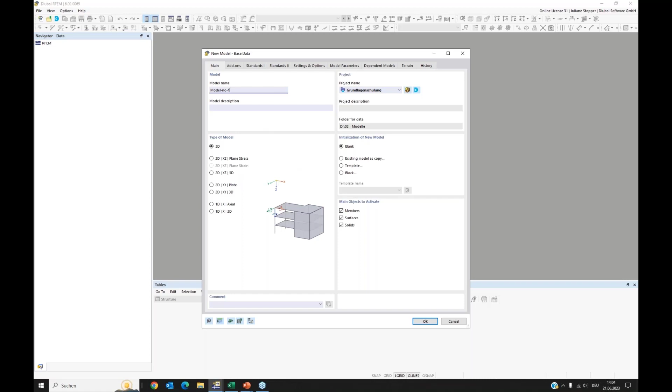In this register, I don't need to change anything. We can jump to the add-ons register and activate our geotechnical analysis add-on. We can find this in the area where the special solution add-ons are placed. So I activate it and press OK. Then our model is prepared, and the add-on will be integrated into RFEM.

So here we go, we have an empty model now, and we can start modeling. At first we go to the materials, and I will create the materials that we need in this first model. I will use materials from the library. We can open the library via this button, and I will use a gravel, a sandy gravel, as the first material.

I can apply this, then I will add a next material. We can have a sand, maybe coarse sand, and we add a third material, a medium plastic clay. This is just an example of materials because we will focus on modeling today.

So yeah, I agree—one more thing. When we have the geotechnical analysis add-on activated, we can select the material type soil. And when we have a material of type soil, we can find in the material model part the valid soil material models. We currently have the Mohr-Coulomb model, and we have a nonlinear elastic material model.

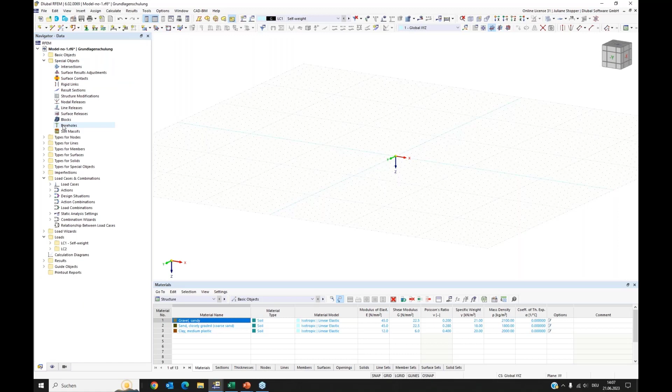Okay, so we have 3 materials prepared. We can see them here, and we can go on. We will go directly to the special objects, and here we can see 2 special objects that came with the add-on geotechnical analysis. We have here the boreholes, and we will now use them.

Here we see the dialog for entering boreholes. The boreholes provide you an option to directly enter the data you have from your geotechnical report. For different locations at your field where you will construct your building, you have values along the depth that came from that report, from tests and so on.

And this you can enter here. You can enter the location of that borehole. You can enter a groundwater level. We will do this here. We give 4 meters, and here you can assign the soil layers.

We start from the top and go into the depth. In my example, we have the sand at the top, and it's 2.5 meters deep maybe. As the second material, we discovered clay, or found clay. It shall be 2 meters, and then we have the gravel, which is 15 meters in my example.

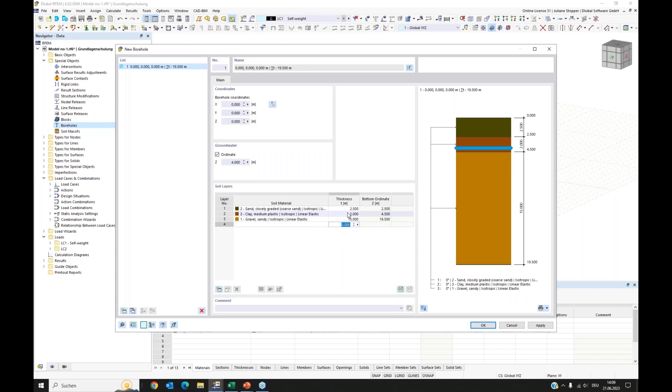Okay, now we have the borehole data given, and we can say okay. Then we see here our first borehole. I will remove this work plane, I will deactivate it so I don't see it anymore.

Here we have the first borehole, and we need some more. We have, of course, more in our field, and I therefore now will use the background layer. We can find it here in the navigator, in the guide objects. Here at the bottom you can find the background layers, and I will open the dialog.

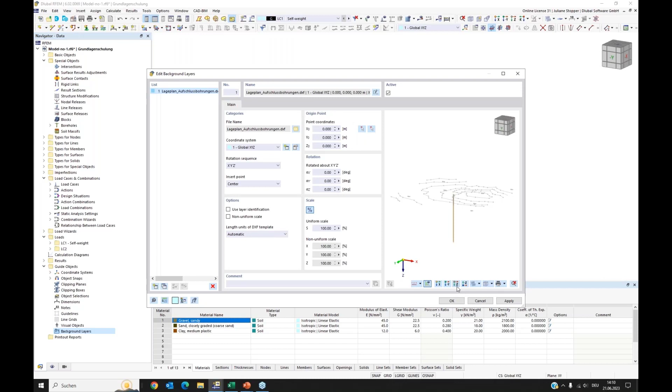As a background layer, we will import a DXF file, and I can do this here. I can directly go here. And here I have the plan of my area, and in that plan the locations of the boreholes are given. I see that I have to transform this. You can do this in this dialog, and this is the plan how it is correct.

And I want to use an option, the option use layer identification. I activate it, and there you can select the layers of your DXF file that shall be used for the background layers. I deactivate the DL nodes. And this is a preview, and I accept this, and this is fine.

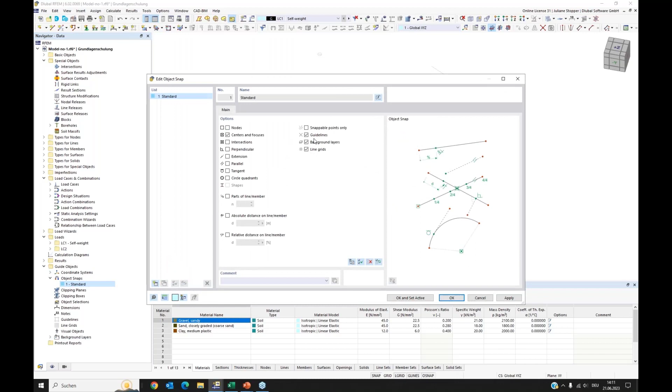Okay, now this is, let's say, my map with the positions for my boreholes. I will modify the object snaps. You can also find this in guide objects. I only now want centers to be picked, and I say OK and set to active.

So now I want to place more boreholes via drag and drop at all these locations. Therefore, I create a node at the top just to help me doing this. Okay, now I can select this. Now I select like this. I have my borehole and this helping node selected.

I press Control and I can move it to the place in my background layer in the graphic. And as you see, the last copy is always selected, so you directly can go on with copying with drag and drop.

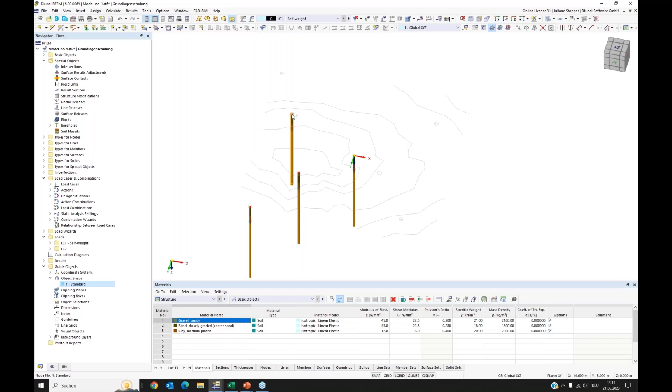And now I have my boreholes prepared. There was no need to measure these dimensions or to fill in data manually. You could just use the drawing.

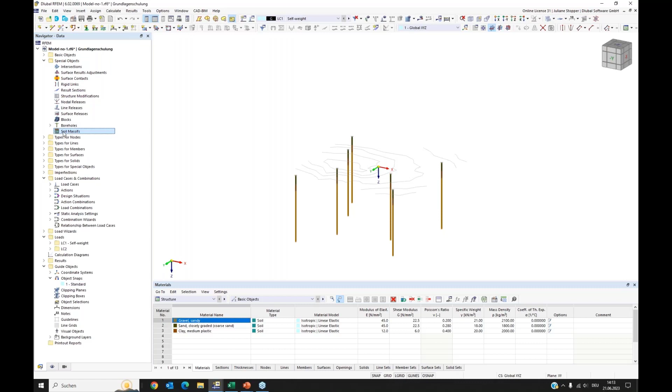Okay, then I want to use my boreholes. I can use them for creating the soil solid that shall be analyzed. And therefore we have our second special object. You can see here we have the soil massifs, and I open the dialog for this.

With the soil massif, you can generate from boreholes the soil solids that you need for the analysis. You can enter manually the numbers of the boreholes, or select them graphically. There I have them assigned.

Then you need to give geometrical information for the soil massif. You have to enter a center, I keep it with 0, and you have to give the dimensions. I will give it 40 meters along both sides. And we have the option to activate a groundwater level.

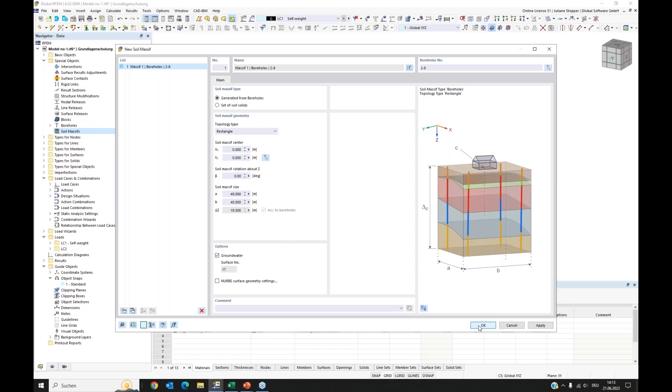Okay, we gave all the input that is needed. And now here we can see our soil massif, our soil solids were generated. I switch on the solid model so we can see it more easily.

And we have here in the navigator for display the option to change the display so that the color is dependent of the object property. We can also see here the material and the color that belongs to each material.

So what came with our soil massif? Our soil massif generated 3 soil solids for us. We can find them here. For each soil layer, 1 solid was generated. And we also have a groundwater level surface generated.

And we also have surface supports generated, this and this. We can see them also in this window when we go to wireframe model, for example. Here we can see it.

We have at the vertical boundary surfaces sliding support, so only in the local Z direction these surfaces are supported, and we have fixed support at the bottom surface.

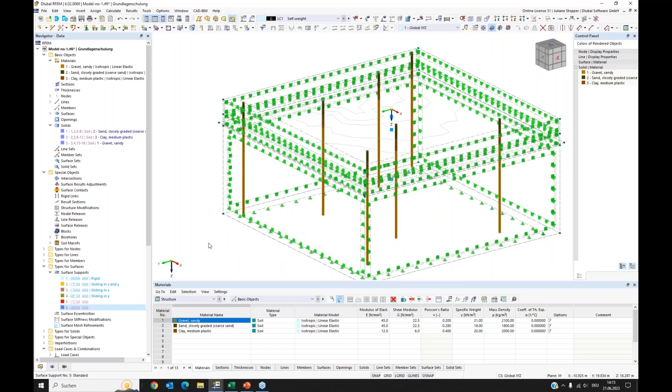So with this generation, the solid is connected to these boreholes. So if you change data in the borehole, if you change a layer thickness or something, the massif will be automatically updated. Yeah, so that's it. This is what I wanted to show with the first model.

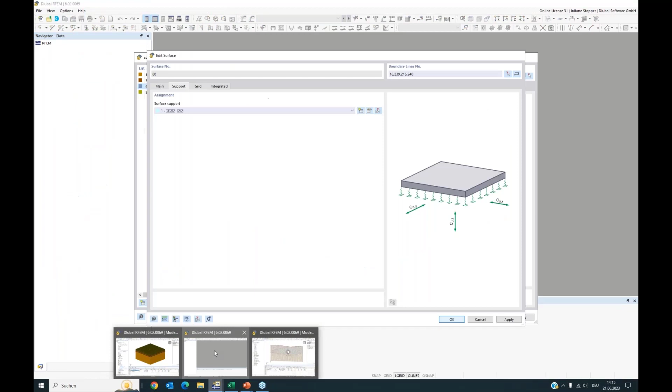We can go to the next example. This one is prepared, I will save it and we go to another RFEM for going on with the next topic. In this next topic, we want to use a DXF file again, but we will not use it as background layer. We will directly import it, and this I can do here.

I go on File and go to the Import button, and here I can import a DXF file. I have to select the file. I have it here. This is a geological section of the ground, let's say, a drawing. And we will come to an import dialog where we can do last settings before the import.

Here it is. Here again I can use this layer identification, and again I don't need all these nodes. In this case, my model is prepared, so I don't need coordinate transformation. So I can say okay, it can be imported.

So, and this is it. I have here now the DXF file imported, and now we can see the difference regarding the background layer. Here we have real objects imported. We have lines and we have nodes, and we can work with them, edit them, modify them, use them.

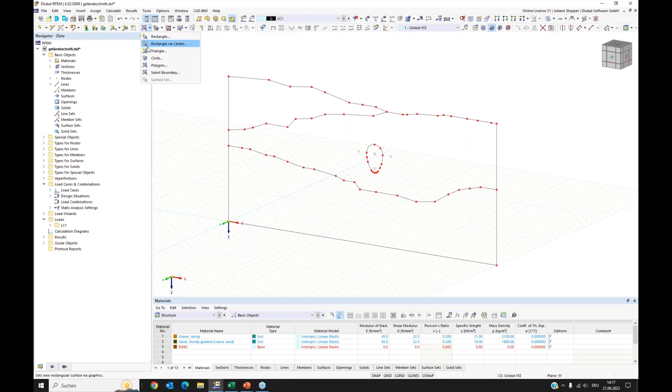Yeah, and this is what we will do, we will use them. My plan is to extrude this model into the depth, and therefore I need a surface here. And this we are going to do. We have here this button, here we can create surfaces, and I use the select boundary option.

I need a stiffness type without thickness, I don't need a thickness. It's just a surface for being the boundary surface of a solid. Okay, I have the first one. I select the next lines of the second surfaces, and the third surface is defined.

Okay, then I want an opening here. This is, let's say, the shape of a tunnel, a small tunnel. And we have here the option to create openings. Again, I use this graphically option where I can select the boundary lines graphically, and my opening is being created. With escape, I can leave this tool, and my surfaces are ready.

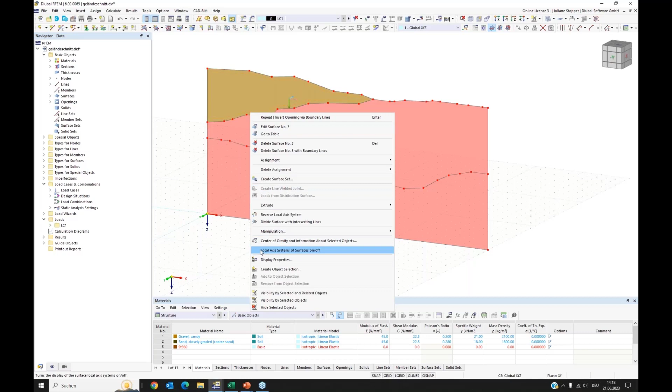Only I want to check the local axis. I can do a right click and switch local axis system on on the display. Now I see my surfaces' local axis, and I see this one is showing into the other direction. I want to have them the same orientation, so for this surface I reverse the local axis system.

This helps me now for my extrusion. I now select all these surfaces, do right click on them and go on surfaces. And here I have the option to extrude, and I extrude surface into solid. Okay, I have here this preview, but I can go here and enter the value I need.

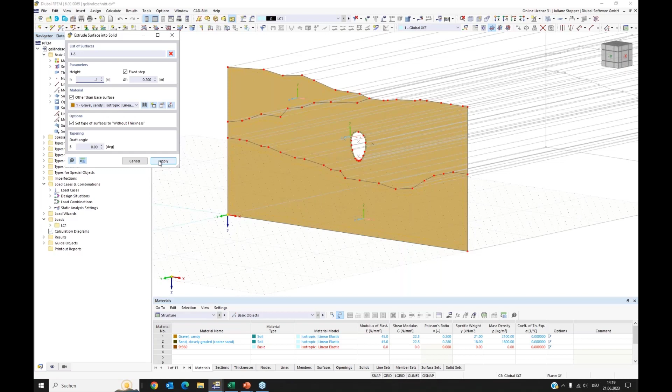I want to have -1 meter for the extrusion. I can apply this, and my model is created. I will switch off the local axis systems. This is a model that can be used if you have plane strain conditions.

Then it's enough if you just cut such a thin layer of your model, and then you can model it.

It is usable for plane strain conditions. Okay, so now here we have solids.

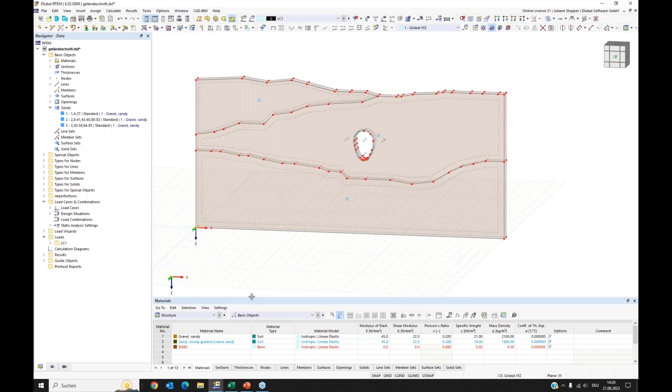What we need is the material. I have materials prepared for this model, so I want to use the Excel import. I have my material here and I import it. Okay, and now I have materials.

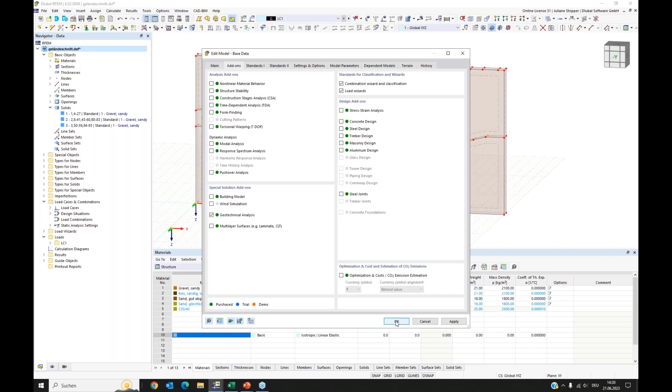I will also go to the base data. As we started with the import, we didn't activate our add-on yet. I will do this. We go to the add-ons register, and again here in special solutions add-ons, we have it now activated. Okay, now I modify my solids.

They are all standard and they don't have the right material, so I double click on the center of gravity and I can change the solid type. I choose soil, and my first layer can have the gravel. Okay, this one is ready.

I go to the next one. Here I have a sand. I will use this one, and of course it needs to be soil as well. This is needed for having the right material models, the option to use them.

Okay, I go to this one and I also set it on soil, and I will go to this material. Okay.

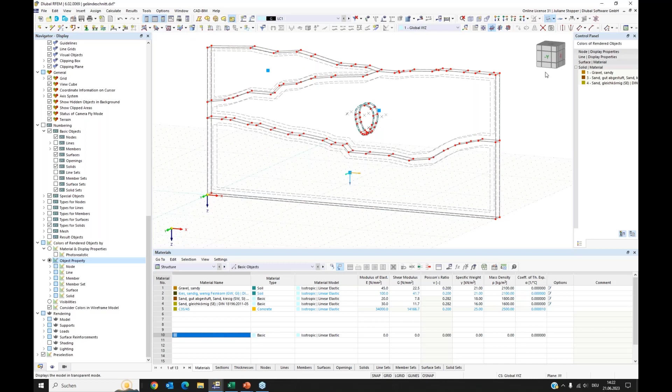Yeah, then I go here. I will change the display so that it is dependent on the object property. If we look here now, I can see that I have my 3 materials used.

Now the geometry is fine, it's finished. What I want to go on with is the boundary conditions. I go to the transparent view and I select my boundary surfaces.

With Control pressed on, I can select all of them. Okay, and now we can do a right click here and edit my surfaces, go to the options and activate the support for these surfaces.

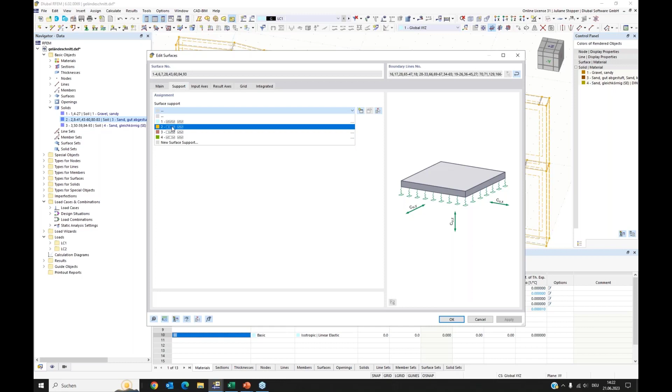I have here some surface supports that I can use. I will use this one, but we can have a look inside also. Here we can see that the Z direction of the local axis is supported, and we can see it in the display now also. Okay, now with escape I leave these selected surfaces and I select this one, the bottom surface.

This gets a support as well, but the fixed support. Okay, now my model is supported. I switch on and off the display of these supports in the display navigator. It's more easy to have the overview.

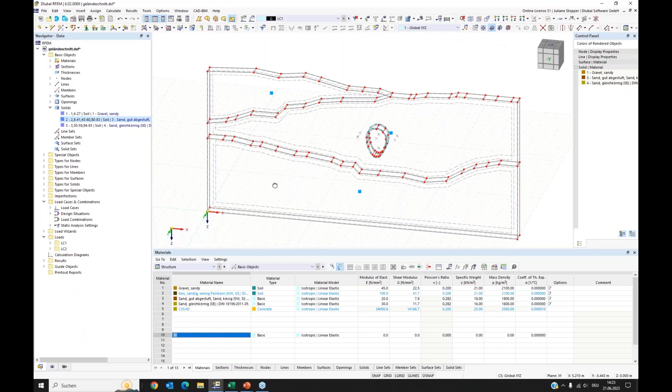Okay, now I want to go to the next step. I want to create the mesh. I'm doing this here. Yeah, and I have a mesh which is relatively coarse for this example.

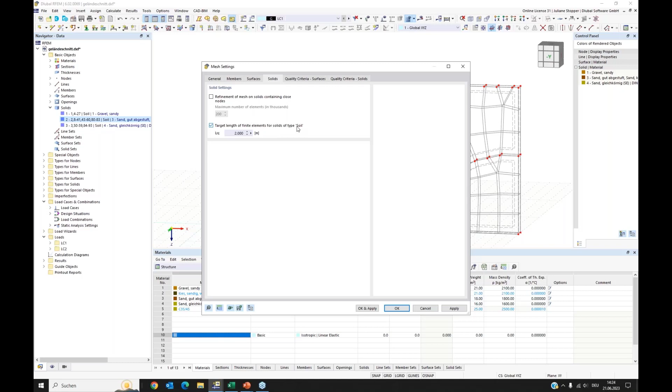We can find the mesh settings here in calculate and mesh settings. We have here a general setting for the target length of the finite elements. This is valid for all structure parts. And we have an additional setting that you can find here in solids. This is valid only for solids of type soil, so we have an own setting for the target length.

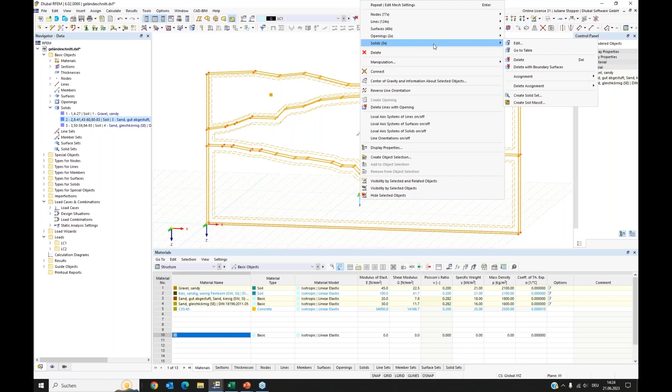Now here for this example, I want to have a finer mesh. I say okay, I don't apply it yet because I want to use another feature for the mesh. I will show you now. I select the solids and go to the center and say solids, edit, because I go to the options.

I want to use a mesh setting, the layered mesh, and I activate it for all the 3 solids. The layered mesh creates the mesh on the surface, and on the other side of the solid, the surface will get the same mesh, and in between there are layers created, and you can define here how many element layers shall be used.

For this model with plane strain conditions, one element layer is enough. So I set this on 1 and say OK.

Currently, it is needed to go here to the layered mesh. This will be worked over, so you don't need to later go there. Okay, now we have the layered mesh activated, and I will create my mesh.

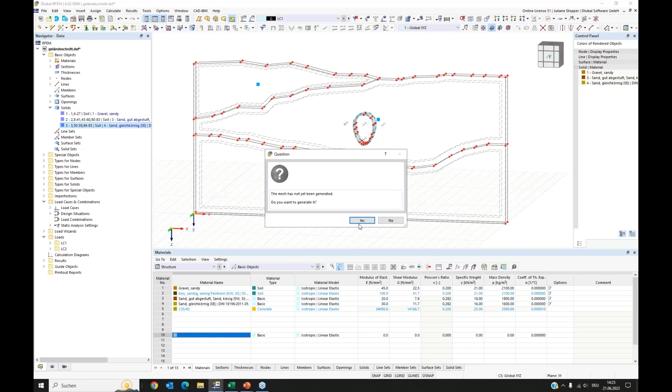Okay, and I can see a nice mesh. We will go to the navigator for display. Currently, we see the mesh of the surfaces, of the boundary surfaces.

If we want to see the solid mesh, we have to check this button, and here we can see the mesh in the solid. It's quite regular, and we can see we have only one layer element.

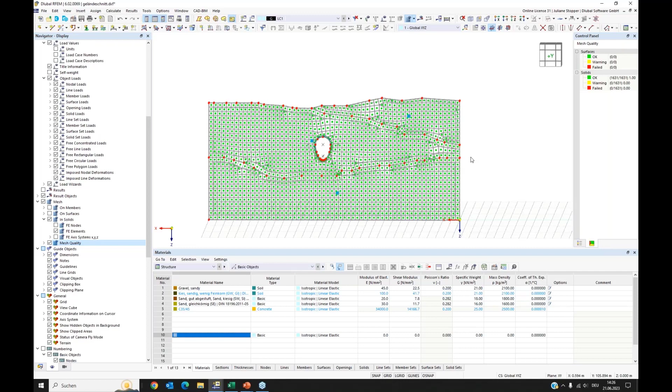One element along the depth. Okay, one last thing I want to show: you can also activate the mesh quality, and here you have an additional register where you can see the color, giving information about the quality of your elements. You can also see if there's a warning or even a failed element. The criteria for these categories you can find in Results, under Calculate and Mesh Settings, where there's a register for the criteria. Okay, that's what I wanted to show with the second model.

This is finished. Now we can come to the third model and the last part of the modeling section of the webinar. For the third model, I want to continue with our first model, for showing the IFC import.

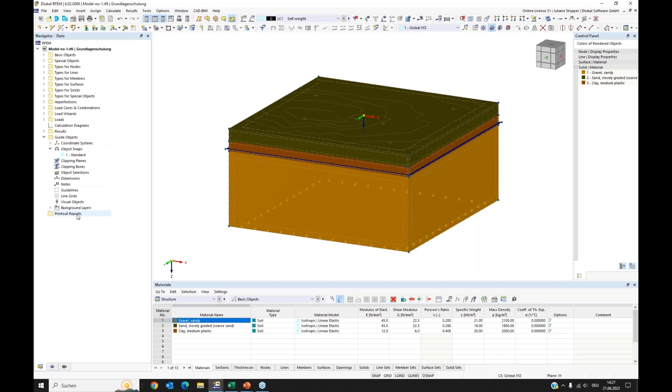Here we have our soil solid prepared. What I don't want to see now anymore is this background layer. I can go to Guide Objects, find the background layer, and deactivate it. So it's still there if you need it for graphics, you can switch it on again, but now it's not shown. Here I want to import a small IFC file of a model.

We go to Import, and here we have IFC, and I'm choosing this IFC file. We will use this - it's a very small thing, but enough for explaining the procedure.

This model needs a coordinate system transformation. Therefore I mirror Y and Z direction, and I say OK.

Here we have some information about the import. I can see which parts of the IFC model were imported, so you have an option to control whether this is what you expected.

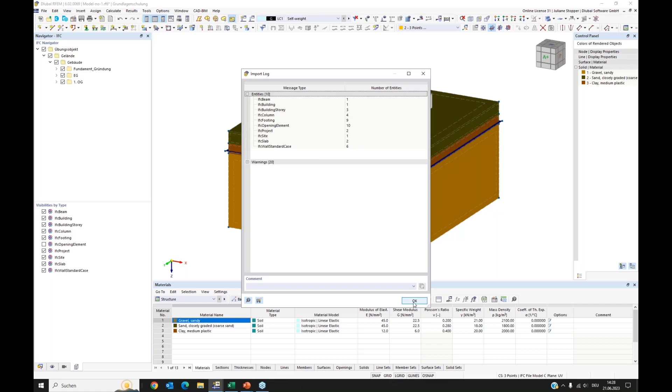Okay, now here we have a kind of IFC viewer, our own IFC viewer. You have here in the navigator an overview of the parts of your IFC model. The IFC structure is a graphical object - it doesn't consist of objects that you can use for the analysis. So you have to convert them.

Because we need a model for the analysis, we have to convert these graphical objects. We want to do this now. One option is you can use this graphical information with object snap and model manually the parts of the structure you want to create. The second option is you can convert the graphical objects you have here and use them.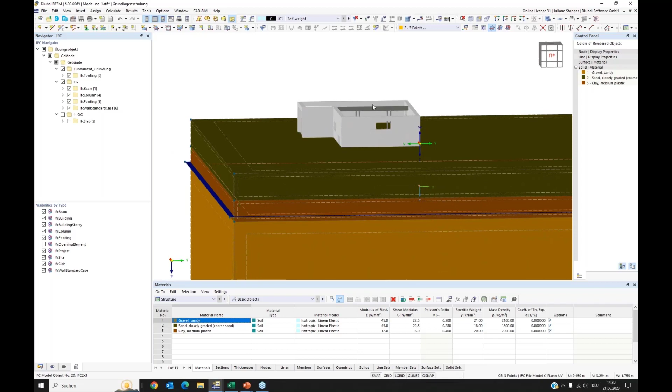I now want to switch off the slab so we can have a look inside of the model, and I want to convert this beam. So I can right-click on this beam and say convert into straight member. This beam hasn't got a material yet - that's why it's displayed in red, because we had only soil materials before in this model. So I can see in the Edit Member section dialog that there's no material.

I can create a new material from here. The dialog opens, which we also reach via the main navigator. Here I can add a concrete, I'll use this one, say OK. Then our beam has a material as well.

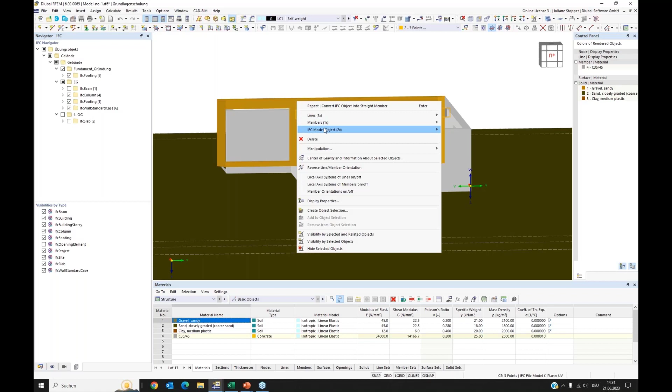OK, you can do it like I did - click here and say convert. But you can also do it from here, from the navigator. For example, you can convert all walls at one time with one click. But I don't want to go too deep into it, I just want to show this example. You have to do some kind of overwork - it's not enough to just convert it. I will show.

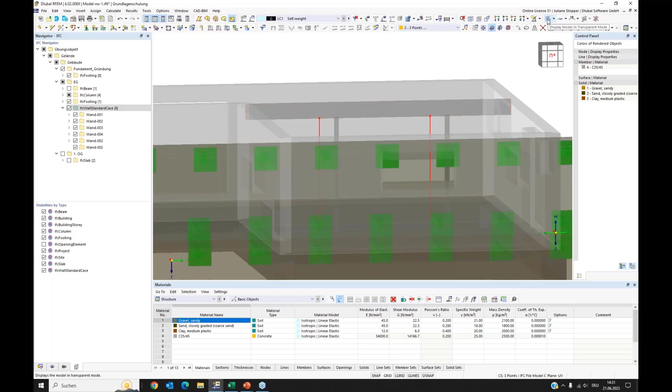I will now also convert these columns, into straight member. It can only convert what exists from the drawing, and the drawing had these shapes. What we can now see, if we look at our RFEM structure, these were now converted. If I switch off the IFC model, I can see these exist in my RFEM model because I converted them to analysis objects, but I can see that they are not connected.

So I have to do some overwork after converting all this. For example, in this case, we can extend them up to the next member, and then they are connected. So some work needs to be done to have the full analysis model.

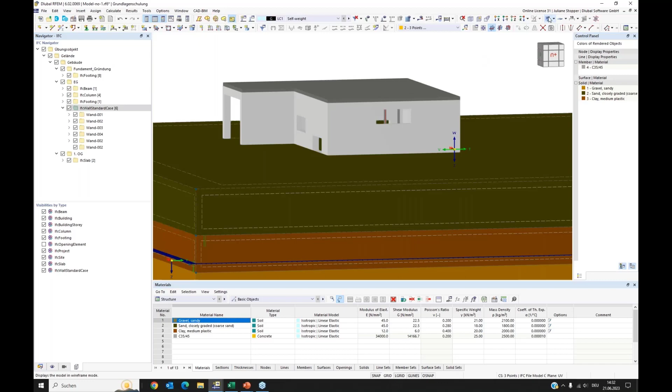We have our own webinars for different interfaces for the import of IFC files or SAF files. You can find several webinars that go into deeper explanations for this. I will stop here now - I just wanted to show this option. We will go to a next model where this conversion is already done. I have it here prepared.

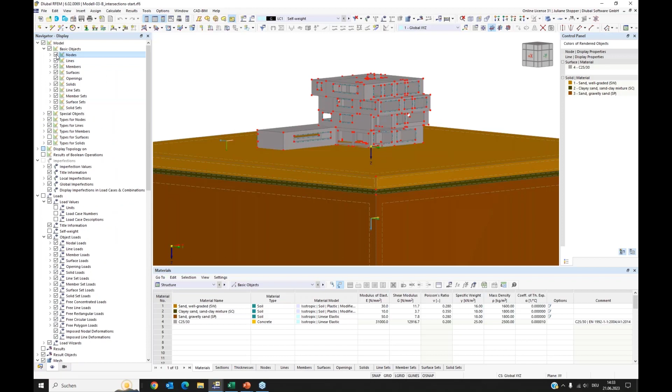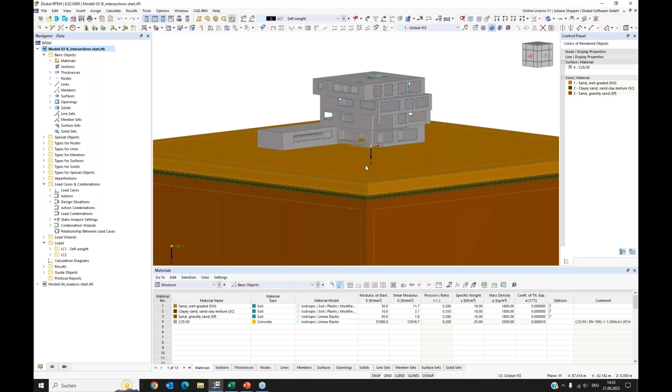In this model, I had a building that was imported via the SAF interface, and it is prepared now for analysis in RFEM. However you reach this model, you can use IFC import, SAF import, other ways, or directly model it. If you have finished your building, you can use it to modify the solid so that they are connected.

If you have a building with a foundation slab that ends on the top surface of the soil massif, it will be automatically integrated. But in this case, we have a building with a basement or cellar floor that is in deeper zones of the soil massif, and it is not yet integrated. Up to now, the building and the massif don't know each other. They don't share nodes of the elements, and they wouldn't share stiffness, so the building is not supported yet.

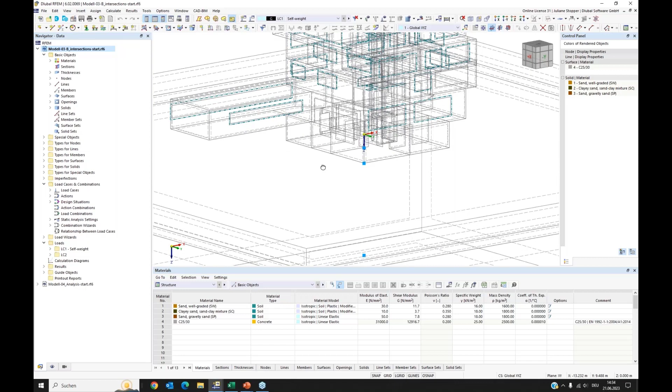That's what we have to do. We have to model it so that it is integrated, and I want to do it with intersections. I want to use a solid intersection to cut my surrounding solid, my soil massif, and this is what we are going to do. I will here in the basement floor create a solid kind of help object. Later I won't need it, but I will now use it for modeling the hole. Here we have extrude, and I say surface into solid again, and we need it to be minus 2.98 meters.

I can say apply, and now I have my solid here. I can also see this. I have soil solids, and here's a fourth solid created. And this solid I will now edit and change the type of solid to intersection.

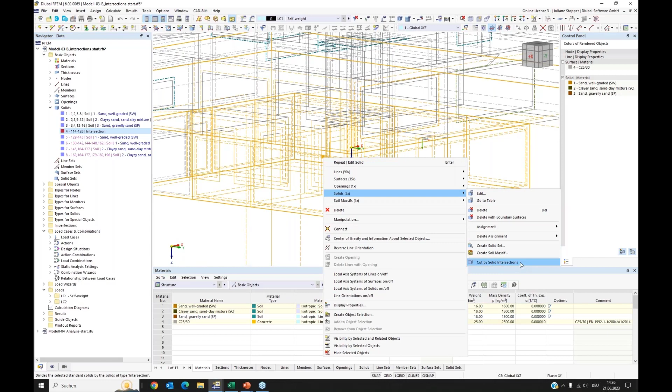With this solid type, I have the option to use Boolean operations, and I say yes. Then I can select them, go on the model and say solids, and here we have the option to cut by solid intersection. And this is what we do.

Then you can see that we have here now one solid at the bottom, and we have the upper layers, and they now have here the opening. And we also have in the building now the parts that were cut from the previous soil structure. We can also have a look at this. Here we can see that an opening is created.

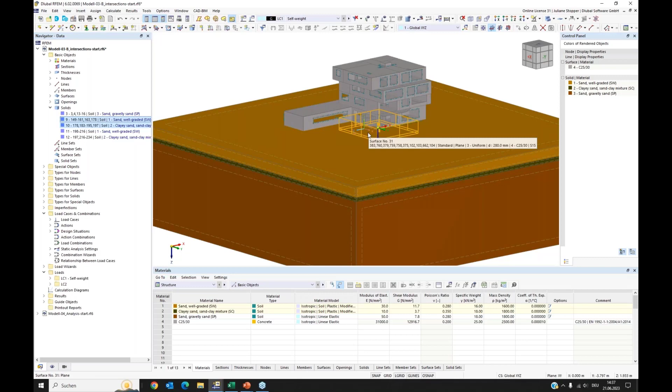We now will delete these soil solids that are placed in the basement floor. In further analysis, when you use construction stages, you can keep them and use them. You can calculate your initial state with all the soil solids, and in the next stage you can remove these solids. You can, with this, model the excavation and deactivate these solids. Here now, for just showing it, I remove them.

Okay, so now I have only surrounding soil and I have my building inside. We can again have a look at this. Now they are connected. They share these boundary surfaces, and the mesh should be good.

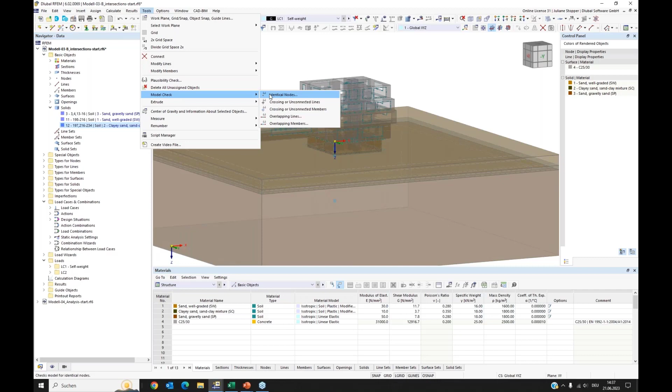I want to show you also the tools we have. We have model check tools. I want to use it because this model was imported, it was overworked, and now we used the Boolean operation. So here some identical nodes were detected in my model, and I can use this selection to kind of repair it, to unite nodes or delete unused nodes. I agree, and now these nodes are gone.

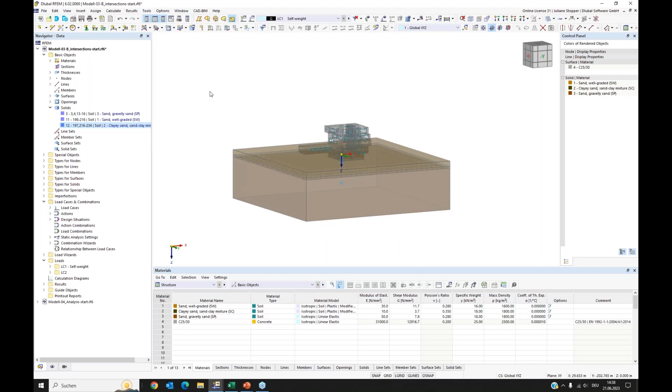Then I want to use the overlapping lines check, and I see I have some overlapping lines. For those, I will use this button. Okay, so if we look now, it is fine. Okay, then I want to do a last thing with this model.

I want to create the mesh. It's a bit more slow because of the presentation. With GoToWebinar, generally it wouldn't be that slow. Okay.

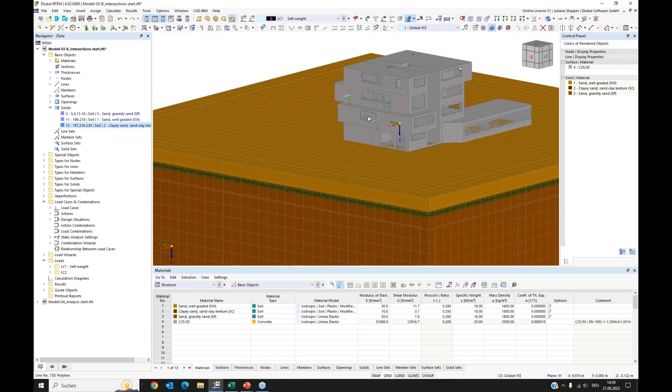Here we can see our mesh, and we can also now see that it makes sense that we have different mesh settings for the soil solid and the superstructure. That's it. Okay, I came to the end with the modeling part of this presentation. I will go back to the slides.

We finished the first 3 steps, and I will show a kind of summary slide. Here we have the modeling procedures that we went through listed, and some additional. We have several interfaces in RFEM 6, and you can find further information about it on our website.

We have web service and API where you can create applications, for procedures you have to do again and again. We have integration with Autodesk Revit. We have interfaces to Rhino Grasshopper. We have an SAF interface. We have an Autodesk interface.

The DXF file that I imported, I could have also directly imported from AutoCAD. There's another option. We have Microsoft Excel export and import. We have DXF import export interface for IFC, and we have the background layers we saw. Then of course you can directly create the geometry and use all the tools we have in RFEM 6 for model creation. And then we have in our add-on geotechnical analysis special objects like boreholes and soil massifs that support you with creating the model.

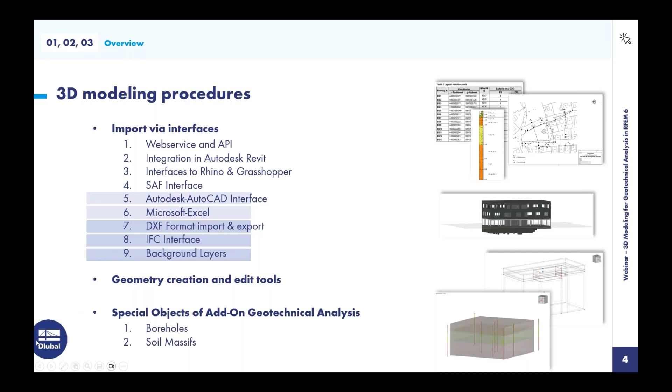Okay, that's it regarding the model part. Now we come to our fourth example. Now we will analyze a model. So I open model 4, and we will have the model in plane strain condition. So I have taken this geometry again.

I prepared it a bit. We have here this existing structure, this small tunnel, and I assigned concrete as material to it. And we have here, let's say, a kind of new structure that shall be erected.

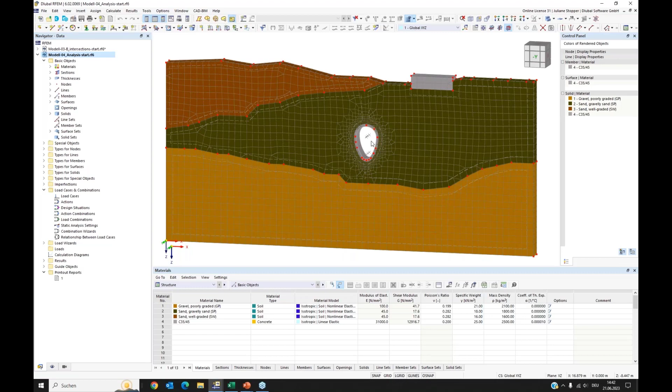And what we want to analyze is now which stresses and strains happen in the soil, and which load, which inner forces will arrive here at the surface of the small tunnel. Okay, for this, I prepared the geometry.

Let's go to the materials. I have now the nonlinear elastic soil material used. You can find more information in the online manual regarding the soil material, all the soil materials, and in the last webinar I spoke about this material model.

Okay, then I have mesh refinement used, we can see here. You can find the refinements in the types. I used a line mesh refinement. And when we have a look inside, here's the assigned lines.

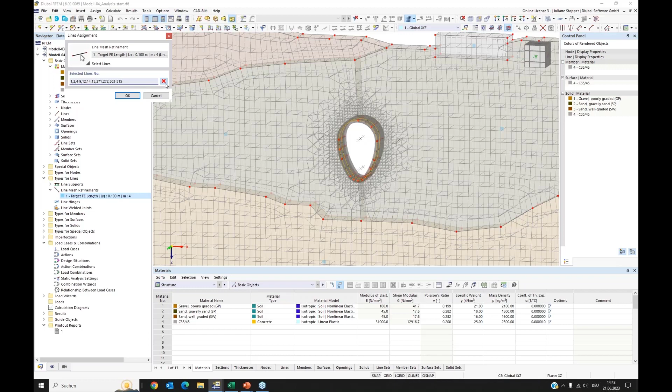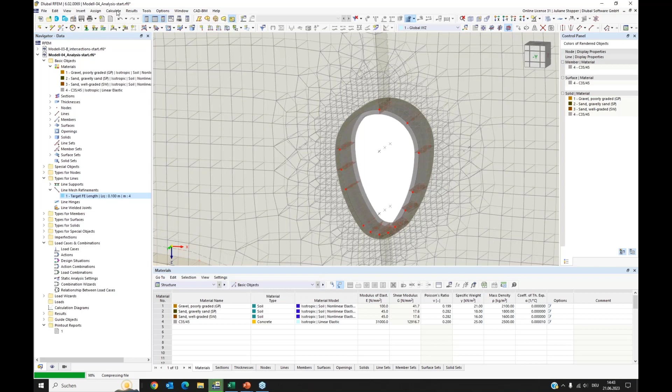We can remove it. I only wanted actually to assign these lines because it's something nice. The layered mesh automatically extrudes it into the depth, so it's not needed in the next step to again assign the lines. It's with this one line it's done. Yeah, you can see, okay, so we have this.

Then all of the topology is prepared. We can go to the loads and open the load cases and combinations. I click here on new load case. I deleted here all previous settings, so we start from scratch. We will define a first load case. We will have the self weight of soil.

Therefore, we have an own action category that comes with the add-on geotechnical analysis. It's the permanent soil action category. With this action category, it's possible to activate self-weight only for soil solids. We need this because in the geotechnical analysis, you need this self-weight of soil load case always as initial state, at least.

Okay, then we create a next load case. I have no static analysis settings given yet, I have to do this. So I create a new setting, I will take the default option. Only I will here use 4 load increments because we have the nonlinear material model used. Okay, I apply this and create a new load case.

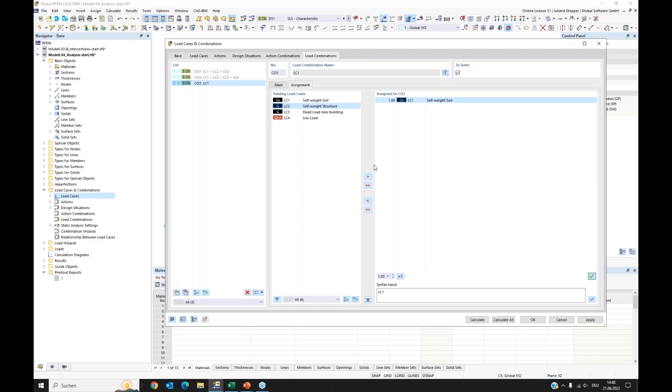Okay, I need another combination. I use the generator, but I can add also manually defined combinations. I want to create, and I need to create my initial state. In my initial state, the self-weight of soil shall be active, and I also want to have the self-weight of my existing building to be active. So I want to calculate the state of my environment or my soil and this structure before this building is erected. So I have self-weight of soil and self-weight of this structure.

I need to do something so that this structure is not considered in the self-weight, because this load case would consider all structure self-weight. Therefore, I have here in the options the structure modification that I can use. I activated it, and we can go into this. And we have here the structure modification. I will give it another name.

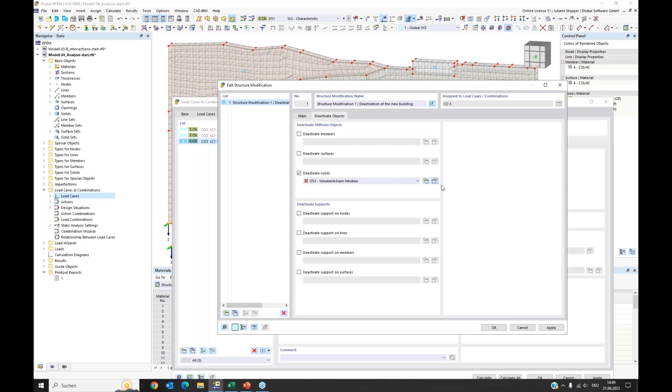It's deactivation of the new building. You have here the option that I used: deactivate objects. In this window, you can select the objects that shall be deactivated. We have solids that shall be deactivated, and here only one solid is selected. We can control this. If I look here, I can see yes, my new building is selected. This is fine, I can agree to all this.

And I have my structure modification active. So in this load case and in this load combination 3, my new building will not yet be considered, which is fine because I want to have here the initial state calculated. I also create a copy of this load case. I now want to have the following situation for my initial state: I need to know the stresses of this soil, because the soil material reacts stress dependent.

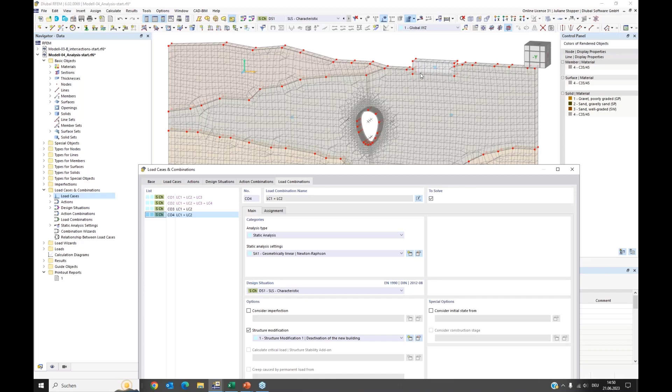So I need to know which stresses are there for using the right stiffness for further loading. What I don't want to know is the displacement. I want it to be reset to 0. When my building is started, I want the displacements to start to be considered. Therefore, we have a special static analysis setting. We can again go here, and I will create a copy of this and rename it. It's actually the same as SA1, only it is for undeformed structure.

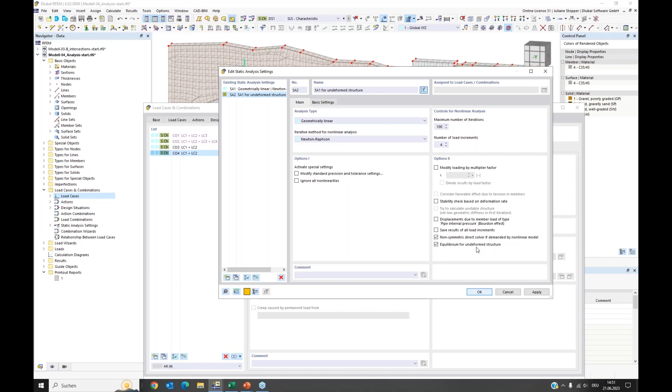And the setting you can find here in options 2. We have here the option equilibrium for undeformed structure. So when you use this setting, the equations that will be solved, the model will be solved, the stresses will be calculated, but the deformation will be reset to 0. Okay, this is what we want, and for this combination 4, I will use it.

And I want this initial state with 0 deformations, but with the stress state to be considered in my combinations 1 and 2. So I select these 2 combinations, and here in special options, you can consider the initial state, and I select this one. So my loading in these combinations starts with the stresses, and the strains of the deformations are set to 0. So with the stresses of this model, the deformations are kept as 0. Okay, so now we have this prepared.

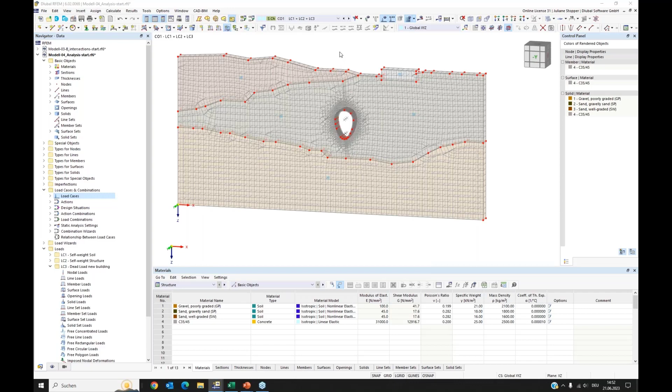Yeah, what we need is loads. We created load cases, but we have to give also loads. I will use this button here and define a dead load for the new building, and I say OK. The dialog opens, I can select the surface. This surface will be used, and I will assign 100 kilonewton per meter square. Now what I wanted to show is that you actually can stay in this dialog and press apply and next, then it would be open, but okay, I closed it.

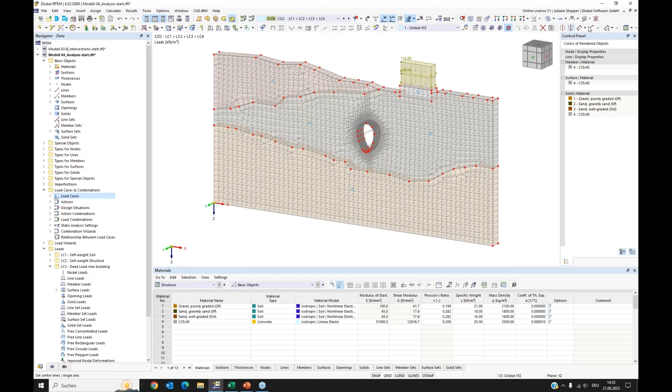So we now can use live load. I will again assign the surface, and you can use 125 kilonewton per meter square. Okay, we can control this graphically. We have the live load and the dead load, and if we look in the combination, we have both of them. Okay, that's it. I can also give some more color.

I have something prepared for this model. I prepared a printout report for us. This can be found in the navigator at the bottom. Here you can do a right click and create a new printout report. You come to printout report manager. Here you can select the topics you want to have in your report. I cancel this as I have already prepared it.

I would like to shortly show this. I prepared it so that I can print graphics now during the analysis process. Yeah, we will do this. Where is it? Okay, this is the first version of my report, and we have something good.

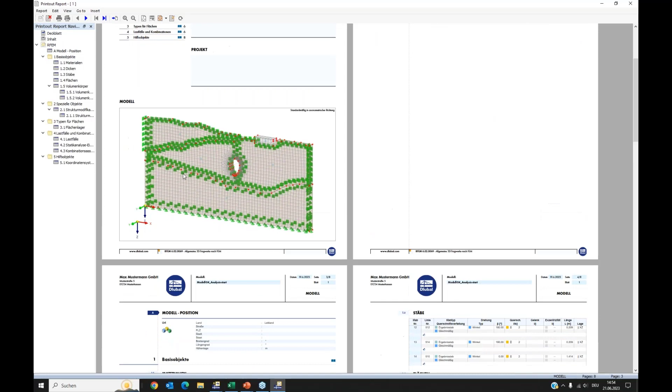You can change the language. We can here in edit set the language. We want English language, so this is a nice feature. You can work in your mother language, and when you work for other countries and you have to give another language, you can change this. Okay, I will close it, and we will now from time to time print into it.

So I want to also print this loading situation. So we can go here on File, Print Graphics to Printout Report, and you get a preview. And I want to only print the current window. And here we see a preview, and it looks fine to me. I say OK. Then it is saved in the report, but it will not be shown, and I can go on working. I can have a look later.

Okay, now everything is prepared and we can start the analysis. We can go here to calculate and say to calculate. And now I would like to at first show this one.

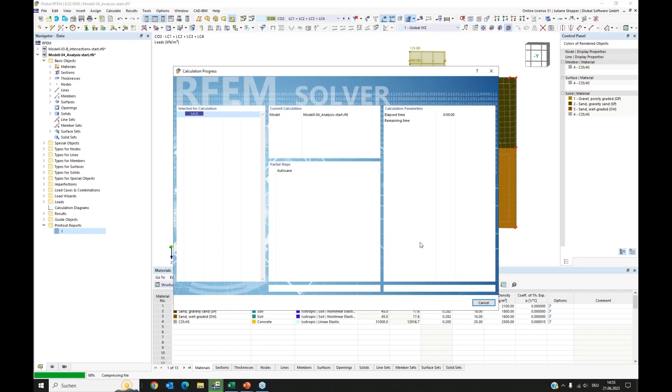This is the initial state where the displacement is reset to 0, and you can follow this. Here you can see the load increments, how they are assigned, and we can see that the displacement is always reset to 0. So this is the typical diagram for this setting.

Now this initial state is calculated. I want to also calculate the rest. We also could have selected this before. I will select the design situation, characteristic, and then all the contained combinations will be solved. So I select this and say OK.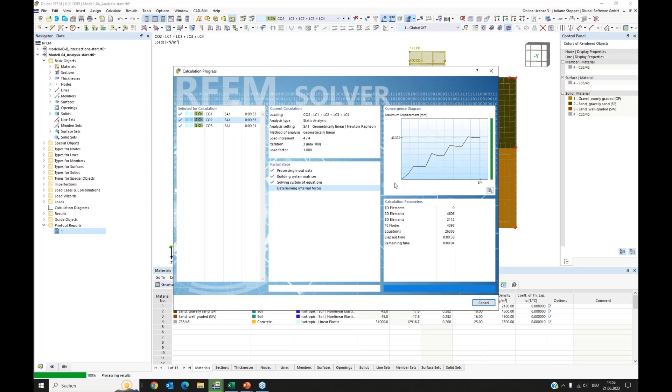Here we also can see the load increments. Okay, now it is done and we can have a look at the results.

First of all, I want to remove the results of this helping structure. Let's say we don't need to see this. I can here in the control panel select what shall be displayed, and I want to have the object selection. I prepared an object selection that only contains soil solids.

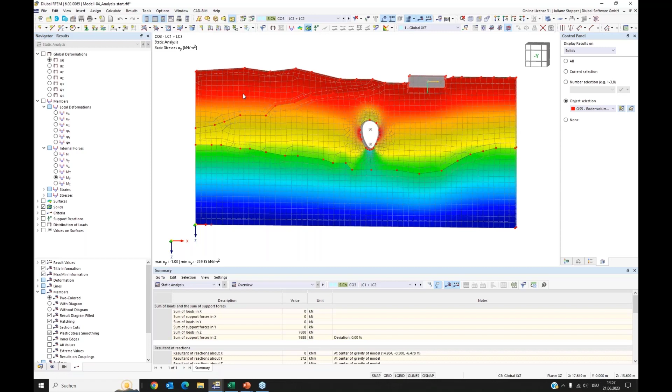But first of all, I want to go to the initial state. So what we have here is the initial state. It's the self-weight of soil and self-weight of this structure. This we deactivated. We have a deformation here, and we have, of course, stresses.

And this is what I said, I also deactivate the mesh. This deformation we don't want to see in our results. That's why we reset it to 0, because when I go and start my construction of this building, for me there's 0 displacement at the beginning of this load case, or load combination. So that's why we have this copy where we said reset displacement shall be used, and we can see it worked well. The displacements are 0.

But if we have a look at the stresses, we will see that we have stresses. And we can also compare it with the previous combination, and we see it's the same. So this is the initial state stress, the geostatical stress, and you can also control it. You can check it with hand calculation. You can calculate with the specific weight and the heights of these layers. You can compare it, and you will see it's plausible. I did it, and it's good.

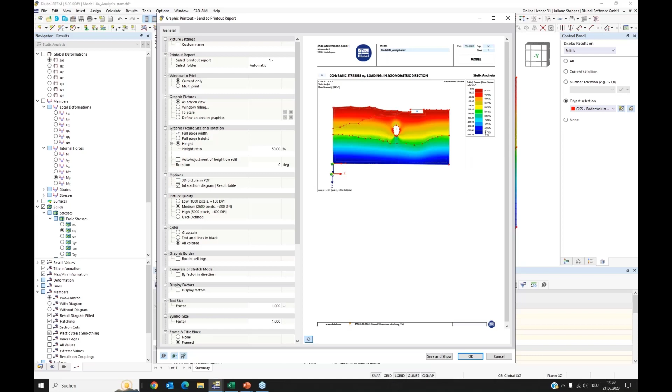Okay, then we can print the graphic. So we have a graphic of the initial state in the report, and I like it, so I say okay. And then we can go to the next load combination, and I will go to the leading one with the highest loads.

This is this one. So at first we can look at the deformations, and here we can see how, with this helping structure, it deforms, and how the deformations go to the deeper soil layers, and we have here the deformations.

Okay, but now we want to have a look at the stresses. We can here select solid stresses, and what we have here is the final state of this combination. So we have stresses of the self-weight, of the soil, of the structure, and also of the new building.

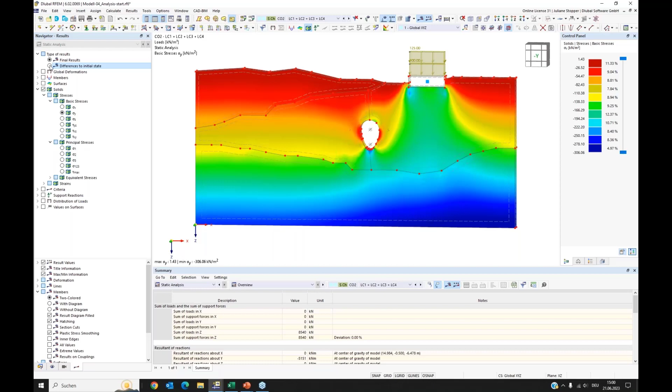We have the option to select another type of result. You have the option to just see the stress that came through the delta load between the initial state and this combination. So what came after the initial state is only this load, and if you activate this button here, you will see the load that came plus to the initial state. And we can see now the stresses that are caused only by the new building.

And here we can see very well how it goes into the soil, into the deeper zones, and that here some stresses reach our shell of the tunnel.

I want to also print this one to the report. And we have again our preview, and it's fine. So we again say OK. And I want to also see the final results and print it to the report.

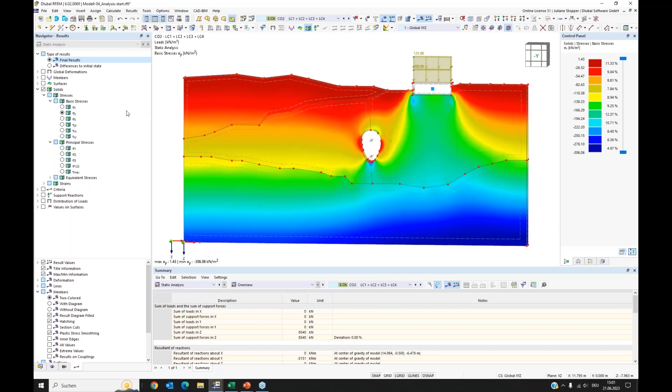Okay, a last step. I want to show that we can also have a look now at our tunnel, at our construction. We want to know what comes there. And I have created a result beam. I put a line in the center of this surface of the tunnel shell, and there in the middle I placed a result beam that integrates stresses and forces of these surfaces that I assigned. So the surface of the tunnel.

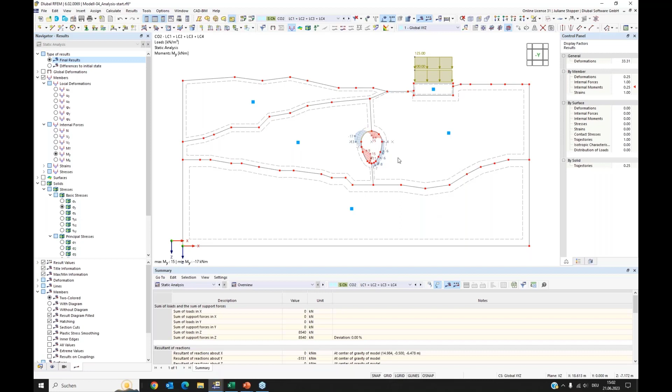That's why I can use now member results, and I can see what reaches due to this load combination in my tunnel. Again, I could also select the differences to initial state. So this is, for example, the moment that came only from the construction of this new building, and I also can look at the final results. So in total, I have this moment. Now I can also check other internal forces. I can check displacements and so on.

What we can do also is select members, as we have the result beam. We can also select a colored shape, and then print this as well to the printout report. And I want to use the multi-print because I want to have the same view, the same perspective.

I will use this load case, this load combination, and here you can select what kind of forces you want to print. I want to print the normal force, the My, and the displacements. Okay, I say okay. Yeah, this is it.

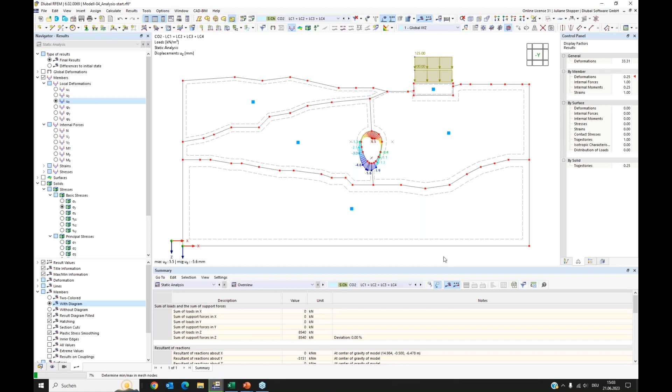I came to the end with that model. This is what I wanted to show you in this first, or short, analysis. This is the first step of the analysis of this situation, giving first information about the stresses, strains, and displacements that are to be expected.

In a further, deeper analysis, construction stages could be used, and the phases of the situation could be modeled more in detail. Then you would model only the soil, then remove the soil in the next phase, construct the tunnel shell in the next phase, do the excavation, and so on. This you could model with construction stages. But for today's webinar, this is what I wanted to show you.

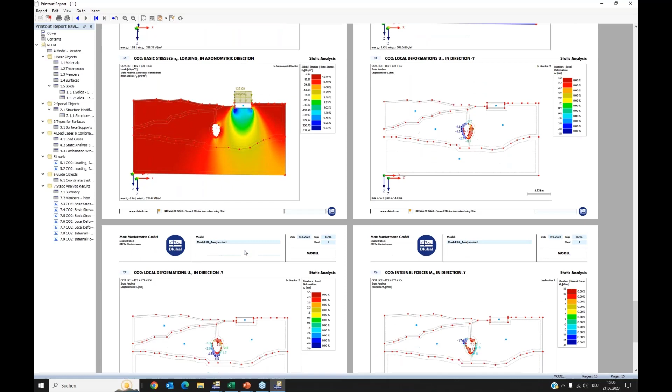As a final step, I would like to have a look into our printout report. Here we now have our report, and we have all the graphics that we printed besides. We have an overview about the situation, and we have our multi-print here.

It's easy to modify your report. You can, for example, click here and say start with a new page. Then we have our tunnel information here. And one last hint: in the material, you can do a right click and say edit, and we have the option to activate our soil material so we get information about it.

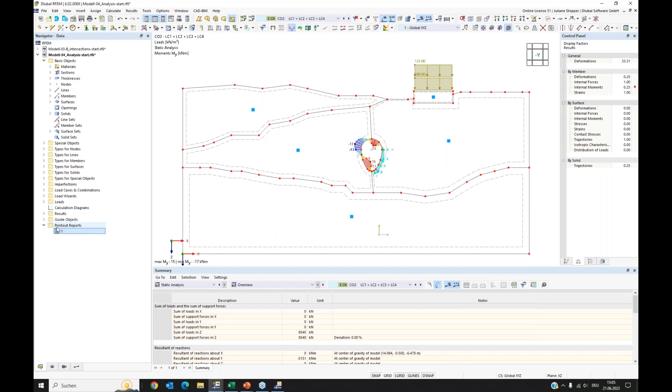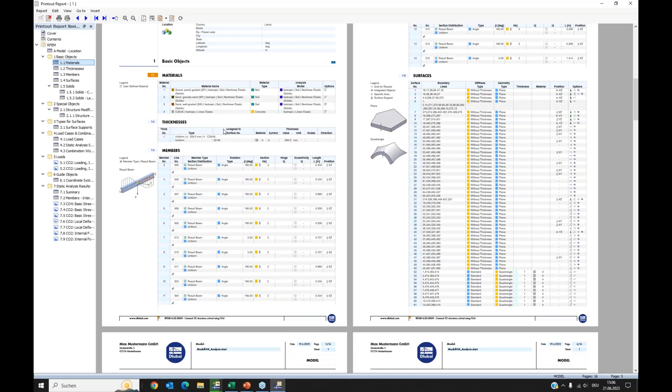It will be shown here also the values you gave for cohesion, for E modulus, and so on. Maybe I should have pressed this button. Save and show. Then it should come. This is maybe a bit slower because of the presentation with GoToWebinar, it's generally not that slow. This is what I wanted to show: you have the option to activate this detailed information about the nonlinear elastic or soil materials.

Okay, that's it from my side, this is what I wanted to show with this webinar. I hope it gave a good introduction of modeling techniques and import options that you can use if you have files or data from project partners. You can use it to make your modeling procedure easier.